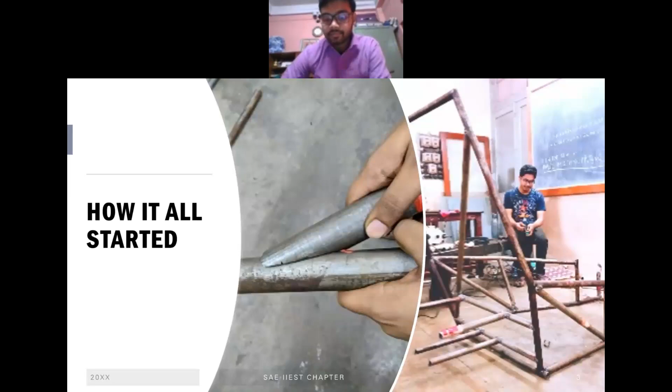Our primary goal was to conceptualize, design, build, test, and validate a single-seated all-terrain vehicle. The design of the ATV mainly focuses on innovative solutions to some fundamental problems faced while off-roading, while giving equal importance to the safety guidelines published by SAE.

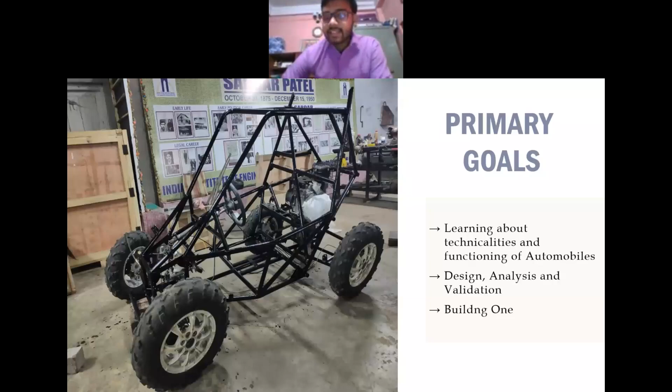Every vehicle consists of different systems which work together in perfect synchronization for the vehicle to run smoothly, and ATVs are no exception. So we divided our team into major departments, namely transmission, roll cage, suspension, steering, braking, etc. Our team has worked hard to design these different systems as efficiently and innovatively as possible.

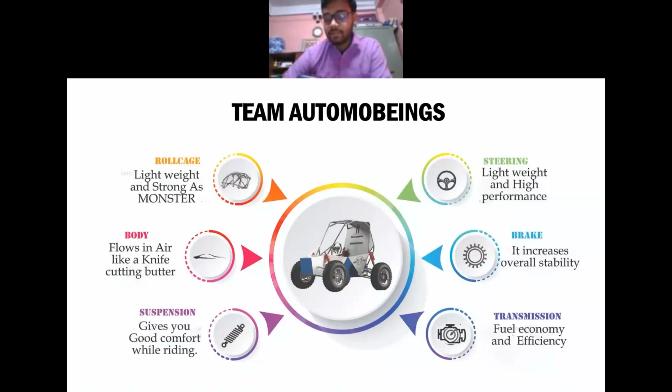Let's talk about the yearly activities of our society. Every year, SAE hosts Baja, which is a global intercollegiate design competition for small off-road vehicles, or more specifically, all-terrain vehicles.

In 2019, though we already completed fabricating the vehicle, unfortunately we could not participate in the race due to the emerging COVID condition. Since 2021, our chapter has been participating in SAE Baja with huge success, despite being one of the newest teams.

Obviously, every team has a name. We call ourselves Team Automobeings.

Every year, SAE Baja brings new challenges, and new challenges require innovation and updating. So, with proper health precautions, a part of our team worked hard to improve and modify the already built vehicle even in this COVID condition.

Besides working on the vehicle, second year members of the SAE IIEST chapter conduct regular interactive sessions for freshers to pass on the light of knowledge and passion for automobile engineering. Senior members, the third and fourth year members of the society, take the initiative to share hands-on experience of using different CAD/CAM software like ANSYS, Fusion 360, SolidWorks, MATLAB Simulink, IPG CarMaker, etc.

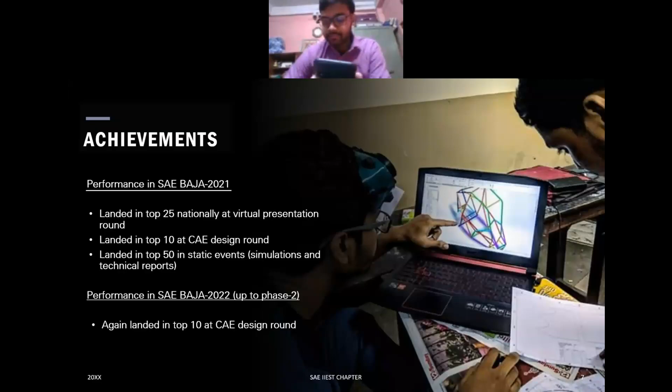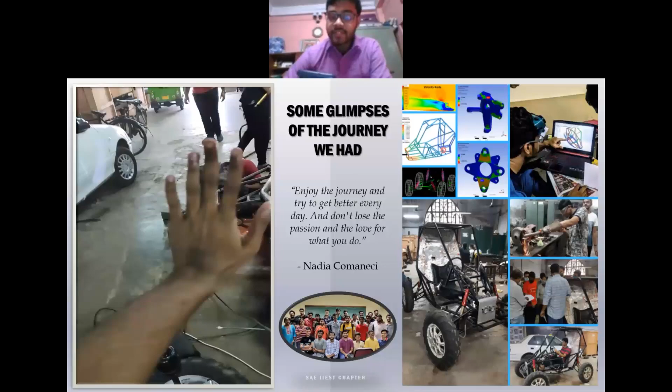I know words are not enough to illustrate the adventurous journey of making your own vehicle. So we have compiled some glimpses of our journey and prepared a mini clip showing how to make an ATV from scratch. Enjoy.

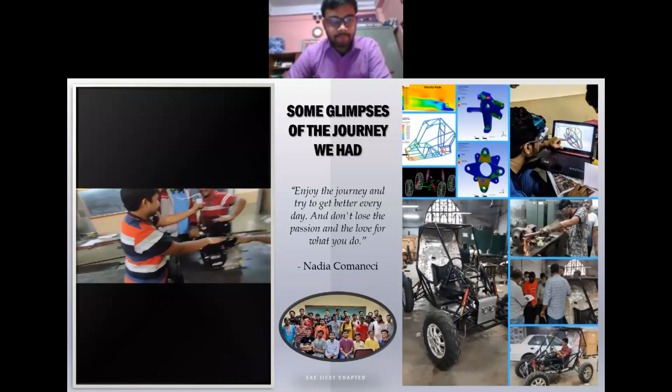10, 9, 8, 7, 6, 5, 4, 3, 2, 1, 0.

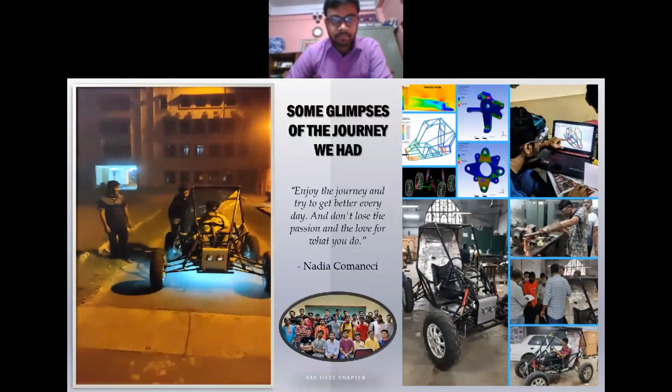Apart from that, we have 5 departments, as mentioned earlier by Sushmayan, and we have heads for each department. Students can take up membership in any department they wish, and they can be members of more than one department too.

We also have our guiding faculty with us who guide us throughout the process. Next slide.

Coming upon the acknowledgements, we are really thankful to our institute, the Indian Institute of Engineering, Science and Technology Shibpur, for giving us a space and the required workshop facilities to do the manufacturing.

We are also very thankful to our Global Alumni Association, GABESU, for guiding us through and also providing monetary support. We extend our thankfulness to Regal Services, Mr.

Shiladitya Ganguly, CEO of Regal Services, for providing us with monetary support when needed. We are also very thankful to our guiding faculties, Dr. Partho Protim De and Dr. Oritra Ganguly, for being there with us throughout the process and guiding us through. Thank you.

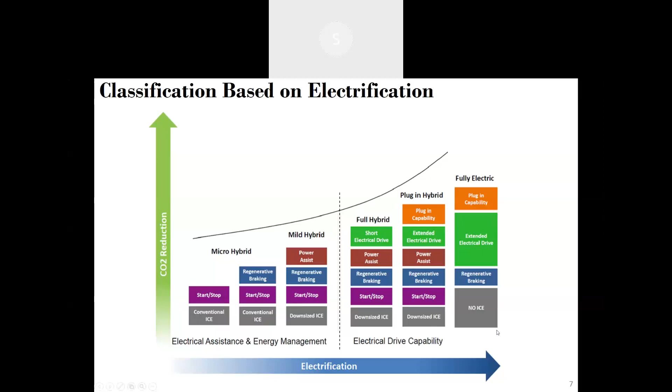And after that, of course we have the full electric vehicle where no engine is there - it runs only on motor and battery. I will explain in details.

Classification based on electrification, again, that I have shown before. And here it is like a small overview of the architecture of different kinds of hybrid vehicle, even EV.

That is for mild hybrid. If you see this mild hybrid, if you remove the battery and motor generator, the rest of the powertrain is similar to any conventional powertrain - fuel engine and transmission which goes to the wheel. Here one small motor generator unit has been added, whose main function, as I have shown previously, is to start and stop the engine, and regenerate when braking is done. That inertia will be converted, generating electricity stored in the small battery, which will be used for later electrical usage.

Then if we go to the full hybrid, again the motor is directly connected to the transmission, to the driving wheel. So not only can the engine drive the wheel, the motor is also able to drive the vehicle.

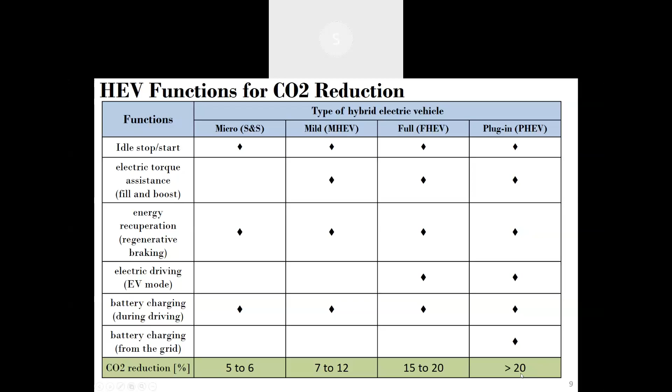Now, HEV classification, that I have already shown the classification based on electrification. And now the motor can be connected at different places of the powertrain. So based on the motor connection at different places, we classify that hybrid electric vehicle.

For example, P0 kind of hybrid means motor is connected to the front end of the engine by belt. So you can think of micro hybrid as this P0 configuration.

And then P1 configuration, where motor will be connected to the engine crankshaft at the position of the flywheel also. So mild hybrid normally has P1 configuration.

And then P2 configuration, where the motor is located between engine and gearbox. The clutch can actually disengage that motor from the engine. This P2 configuration motor also comes with another clutch for different functionality.

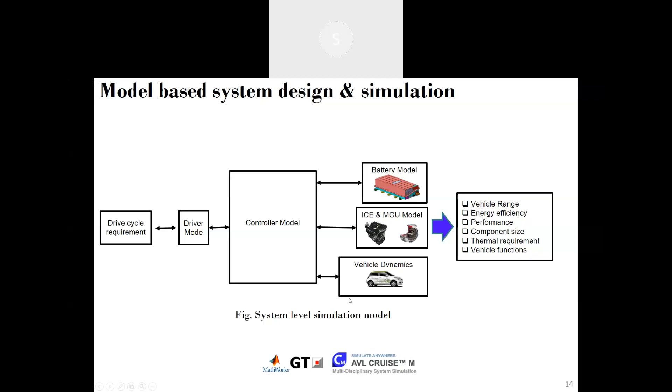And while doing that, there are many commercial packages available, like MathWorks MATLAB, which obviously everybody knows, and then GT Suite and AVL Cruise we use for system level simulation. Okay, now I will tell about the EV architecture and key components.

So here I have shown that, as I told, in system engineering we have to develop different requirements, and those requirements consist of vehicle architectural requirements, all component sizing requirements, and vehicle functional requirements too. And also, if some function or component fails, then the failsafe function, that is diagnosis and failsafe.

So here, for example, if we have prepared one EV architecture like this, these are the main components of any electric vehicle, where we'll have one inverter, one motor, one DC-DC converter, one onboard charger. Motor is for driving the vehicle, and the DC-DC converter: motor and battery are at high voltage, but we need low voltage 12 volt for other applications. So we need one DC-DC converter which will convert high voltage to around 12 volt for all the loads.

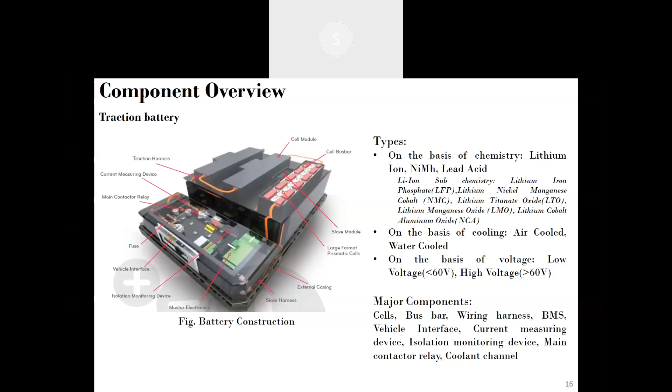Then, component overview. The main components are the electric motor and inverter, and also the inverter and DC-DC converter. Electrically they are not the same, but the working principles are the same, so we have put them there. Also, sometimes the inverter comes with the DC-DC converter, so I put them in one place.

Electric motor: as per construction, normally we use a permanent magnet motor or an induction motor. But normally we have been using the permanent magnet synchronous motor for the vehicle. On the basis of packaging, it can be inline with the crank or belt driven. And also this motor can be air cooled or water cooled.

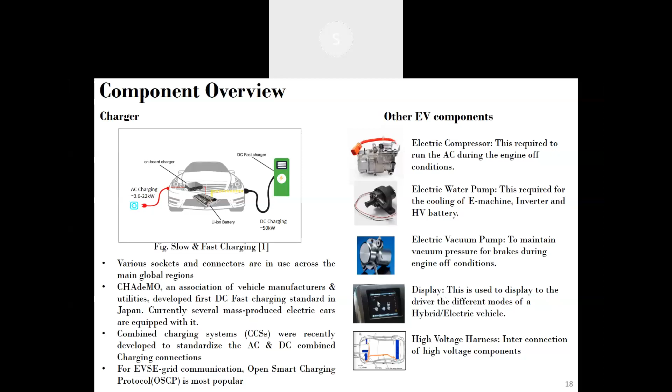So for example, electrical tests are normally performed. We broadly divide tests on the battery pack into electrical tests and mechanical tests. In electrical tests, we do short circuit tests at cell level, module level, and pack level. We even apply overcharge and check the battery. We check the battery life, how it is performing.

Whether that battery pack is showing a proper power limit and whether it is providing whatever power we are demanding under all conditions, what the capacity is and how the capacity is decreasing, even thermal behavior, and of course the BMS development, that is the battery management system, which actually does all the work at the battery level, and it also has its own diagnosis function.

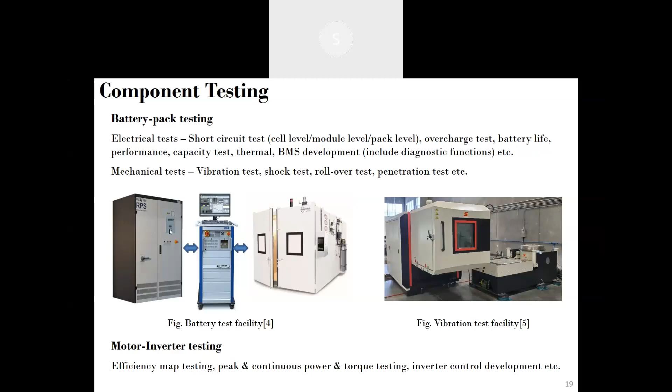I have already explained the different components and given the overview. Now controllers: in an EV there are many controllers, but I have only listed a few which are important and specific to EVs. For example, EVC, the electric vehicle control module, is the supervisory control module. Whenever the accelerator pedal, brake pedal, or selector mode is selected by the driver, the EVC module will judge the driver demand torque, and then accordingly communicate with the motor, inverter, and all other components about what state it is in and what is required now.

Similarly, there is the BMS, as I have already mentioned. BMS is the battery management system, and it normally controls state of health and also state of charge. You can see in the meters the percentage of SOC, and it also does cell balancing. When the battery is charged, all the cells degrade over time, and it is not possible that all the cells will always have the same voltage.

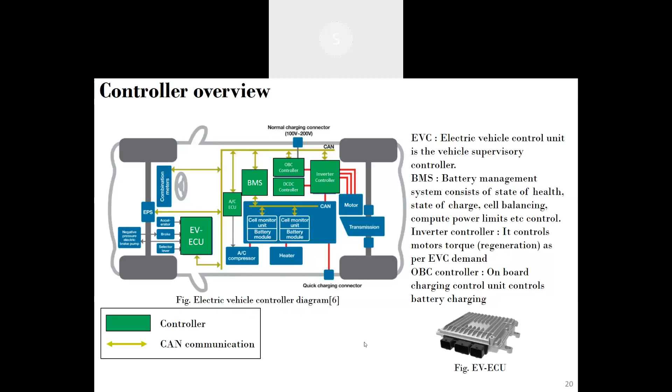For example, for BMS, we have to estimate the battery health, so the state of health algorithm will be modeled in MATLAB Simulink - normally we use MATLAB Simulink. We prepare the SOH algorithm and also the plant model, meaning the battery model, which is required for this control algorithm to run. We prepare the plant model and check how it is working. So these are different development tasks - somebody develops the plant model, somebody develops the control model, and by integrating them we check whether our function is working as per intention or not.

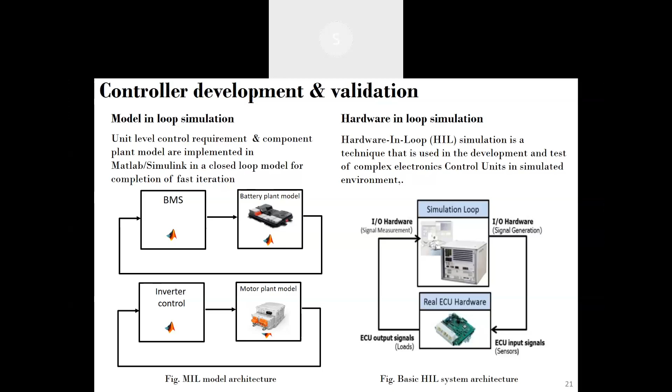So with this I just came to the end, where I will summarize the total content we have explained today. Air pollution is a major challenge for India currently, and as we are aiming for a carbon neutral nation by 2070, different roadmaps and preparations are in progress.

Electrification of powertrain is one of the major steps to reduce the carbon footprint in the short term as well as the long term. Then we have seen some classification for electrification and also for hybrid, different types of hybrid vehicles.

Then we have seen the development V-cycle, where we explained how the system is designed, system requirements are generated, and those requirements translate into component level hardware requirement preparation. I showed different hardware and how they are designed as per the requirement, then software for that hardware is prepared, and we test all those hardware and software in facilities, and after that they are integrated and tested in the vehicle.

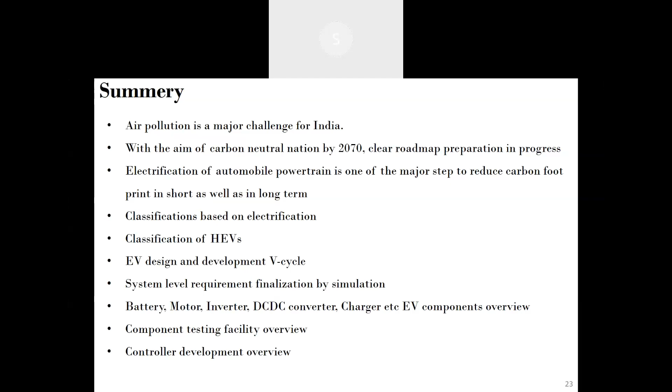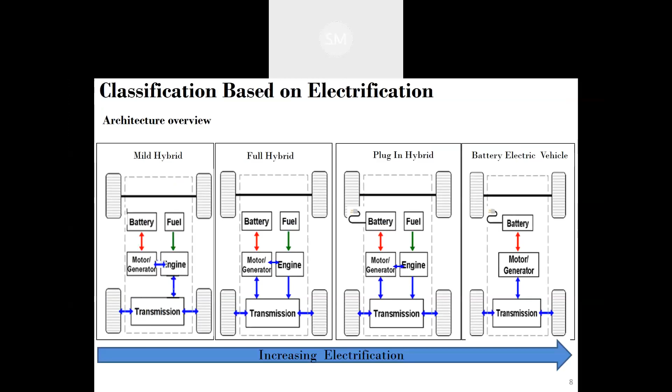Sir, in hybrid electric vehicles, in the different types of hybrid engines, is the flywheel used the same type? Yes, it is different for different vehicles. It is not the same for all types of hybrids. Normally, if you see normal hybrids in India, there actually you have a flywheel. But if you see the Toyota hybrid system, which is not here in India, it is a different kind of thing.

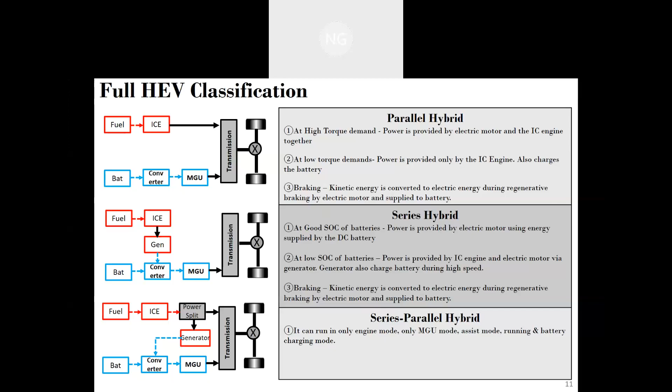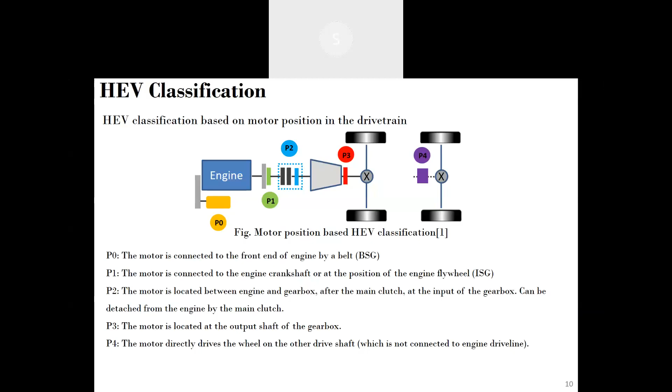Sir, I have one question about a kind of fuel that was used recently, which I heard about. Can I ask on that? Okay, I don't work on that, but you can ask and we'll see. Sir, some time back TVS showcased a bike which would be running on methanol fuel. What is that?

Okay see, actually now not only pure gasoline is used currently, and the government is trying to reduce this gasoline import. So what they are doing is blending with methanol and ethanol. With that blending, you can blend with alcohol. There are some limits currently, a target around 20% blending they are going to do for fuel. That will reduce the import duty, cost, and importing burden of India.

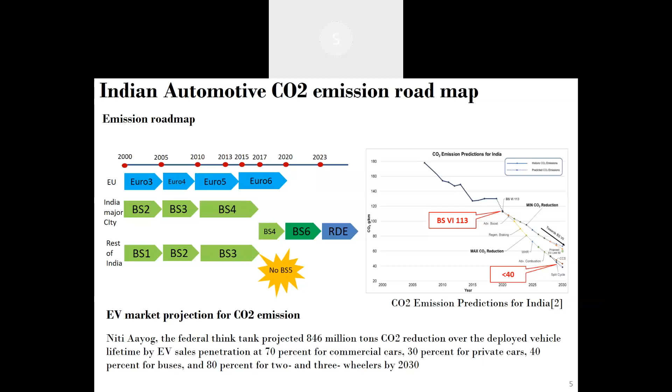Sir, does that mean the thing they are showcasing is completely renewable, or just a mixture of both? 100% methanol I have not seen. 100% ethanol can be used, but I think there is some modification required in the engine. I'm not an expert in that, but as per my knowledge it can be used. In case of ethanol, I have seen some. Normally we prefer to go for blending only. To reduce oil dependence, the Government of India has also increased the percentage of these alcohols very recently. So 100% alcohol based fuel, actually, is not there.

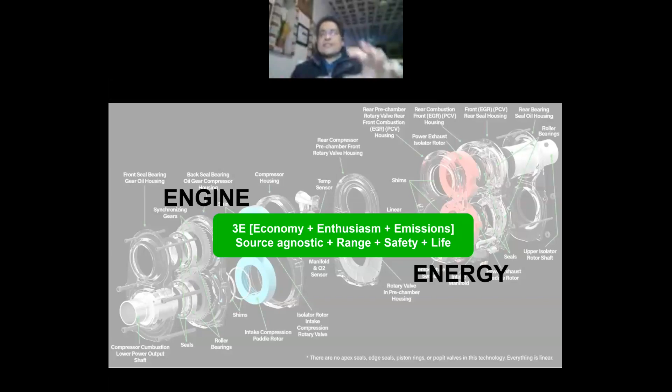And CNG is obviously going up in numbers. But will I get the same level of enthusiasm or dynamic performance when driving a CNG vehicle? If I don't, then the CNG options would be restricted to either fleets, like taxis, or to people who are not really enthusiasts. But what really makes the automobile world interesting is that small section of people who are the enthusiasts, because they actually go ahead and drive people like you into designing and devising better products.

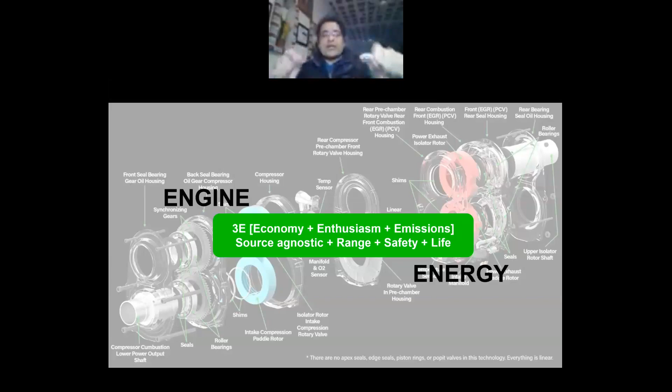Therefore, that balance between the engine and the energy is another balance that you need to work on. And that is, again, another important consumer trend which you people need to understand.

So to end, that was my brief talk with all of you. To sum it all up, as I said earlier, there is no one solution. The consumer, just like the policymakers, just like the vehicle makers, is also in a state of flux, to paraphrase Karl Marx.

But at the end of the day, there are various options available to us. All those options are feasible. All those options are viable. All those options are moving towards that one single target of sustainable mobility for all. And with that, I actually end my session here today. Any questions? Most welcome.

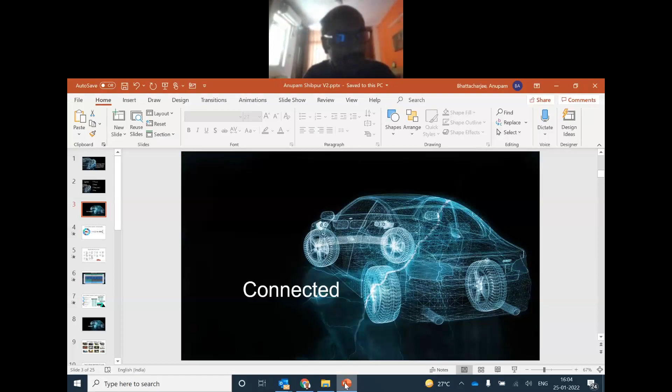I hope you understand what a connected vehicle is. I'm sure many of you know, but the kind of features and use cases coming are so boundaryless and numerous that nobody can say they know everything about connected vehicles, and use cases are still being finalized. So I'll quickly talk about what a connected car is.

Through the mobile network operators, or MNOs, it gets into the cloud. Now, when it comes to the cloud, it is not just data about the vehicle. It includes CRM data and ERP data within our organization. Everything gets clubbed together, and that data is then consumed through websites, mobiles, and so on.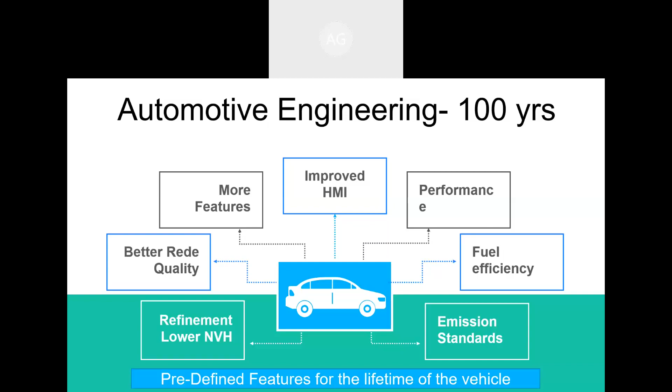Okay, thanks. So I have 2 more quick slides, and this is very important. Please pay attention to this if someone of you wants to take your career to the next level of work, which is not even done today. There is nothing technical in this. I just want to make you think very differently.

Now just imagine what is automotive engineering and what has happened in the last 100 years. 100 years back also the same car with that engine, drive shaft, wheels, and today it is the same. So in the basic car in the last 100 years, frankly speaking, not much of the disruption that has happened in other technology industries. Say for example mobile phone. In the last 10 years, what has happened is unthinkable, unimaginable. I'm from the automotive industry, but I'm still saying that in 100 years, not much has happened.

Of course, refinement has happened in the cars. Earlier the NVH, noise, vibration, harshness, was too high; now it is very refined. Ride quality has become so good. Earlier you could not have read a newspaper sitting behind inside a car, but today you can. If you sit inside a BMW, there is absolute silence inside the car. Also many convenience features and certain screens came, but car remained car. Same engine, same belt, same control, same steering wheel, same everything.

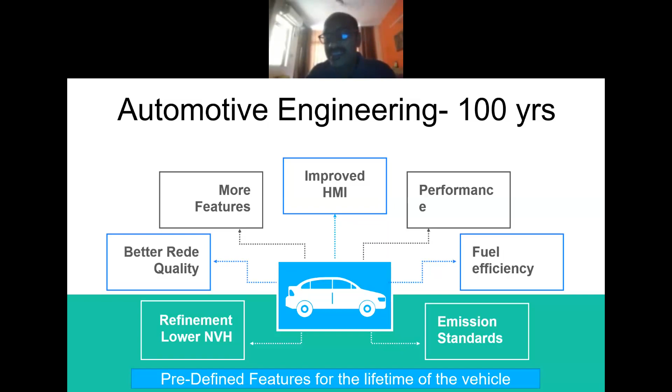Can you really bring Apple CarPlay inside a car if it is not coming with that? Can you really control AC from outside? Can a car be made a connected car by aftermarket fitment? All these things are not possible. Okay. Now Tesla actually had challenged the status quo.

They said we will not define a car in the beginning in terms of what are the features that I'm going to give. They said I will create a car in such a way that I first define what is the hardware that I want to put. Okay, so they took up the drawing board, and they decided that we will put these 25-30 sensors, actuators, and so on and so forth.

They also said that inside a car there are many switches which actually actuate many things. Say for example cruise control. Why I'm saying it is not possible is because for cruise control you need a software system, you need an outside hardware system, you need actuators inside the car like switches and so on and so forth. But Tesla said I will not keep any switch, I'll keep only a touchscreen. Okay, so first they actually defined hardware.

Say for example my car shall have a LiDAR. Now LiDAR is what? Basically radar with a laser. It actually senses what is there all across. Then Tesla said I will have cameras all across, I will even have a camera facing inside, without knowing what it will do with that. They said I want to make a very robust hardware system for cars.

Now I'm just blipping those dots. They are just representing certain hardware that they are putting inside. Then they said that I will put cameras, I will have RPM meters across all wheels, I will sense temperature, I will have a complete touch screen inside and not a single knob or a single actuator. I will have a smell sensor, I will have light sensors inside and outside.

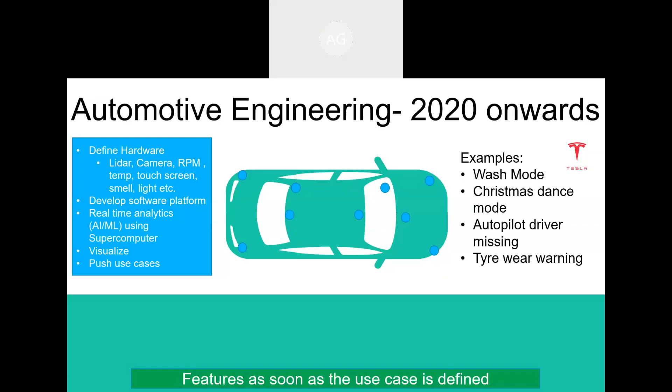Sir, again some voice issues are coming. Sir, please look into it. Is it better now? Much better, much better. Please go ahead, sir. Okay.

So actually they defined a software platform in such a way that you can onboard any hardware into it. So your platform can onboard all the hardware that we have talked about, not only of today, but even for tomorrow. And then they put a supercomputer behind it, NVIDIA processors, a high-end supercomputer within the car.

They are basically the brain for the platform, which picks up all this data in real time, does analytics in real time, and gives output. Now Tesla has something called Autopilot, which is basically a semi-autonomous kind of vehicle. So if you sit inside the car and put it on Autopilot, it will actually drive on its own. They tell you don't leave the driver's seat, be there. If there is an emergency, just use this. Now I'll tell you what has happened, how this software-driven vehicle works.

Sir, it is not audible. And he was driving the car. Actually, again, there was a temporary disruption. Am I audible now? Well, perfectly, but sometimes it is going, sir. Maybe because of my internet connection. Maybe, I really don't know.